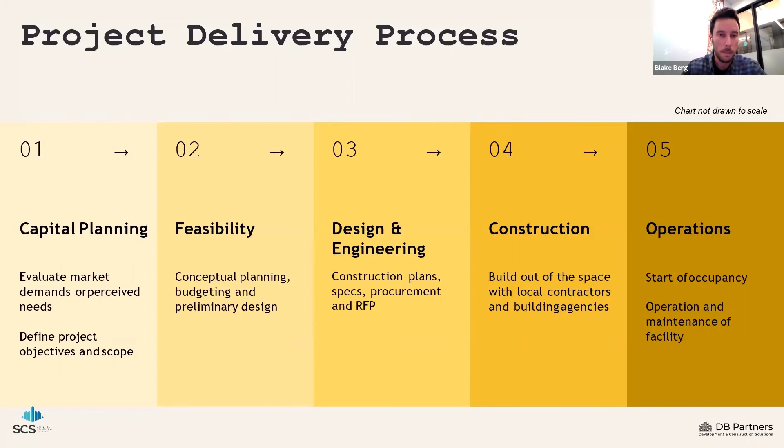And just a note, obviously this chart is not to scale, because the operations of an asset or of a building may last 10, 20, 100 years. Now, in layman's terms, what that really means is scope, schedule and cost. Now we're going to plan and figure out, okay, here's what we're going to do. Then we go and do it. And then, during operations, we're checking and adjusting. And so that really is a broken down version of the project delivery process from an owner's perspective.

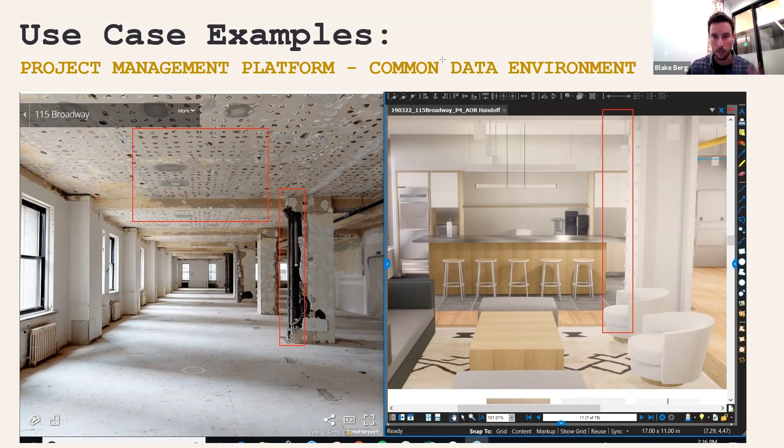I'm going to just keep going with this example. So, why invest in something like this? It's all about speeding up your time frame to deliver information, right? So instead of having 15 different people go to site, walk, survey for what they need to see, an owner can take this on, do a Matterport or similar, send this around to everyone, and the speed of delivery of design as well as planning and construction will increase.

Increased translation of information at key milestones. So again, you're trying to limit how much information falls through the cracks at each of the key milestones by sharing as much information as possible. You have your one source of truth. It's super easy using any of these platforms just to find information on the go versus having to run back to your office or your field office to find information.

Your workforce utilization increases. This is pretty key. It happens across the board on a lot of these things, but I'm all about making sure that your administrative burden reduces. And what that means is instead of everyone having people that do administrative work to stay organized, why not take it on in one office, as a project management office or as an owner, to keep the whole project organized and reduce the amount of administrative work people are doing so that they can spend more time doing the job that they're getting paid to do.

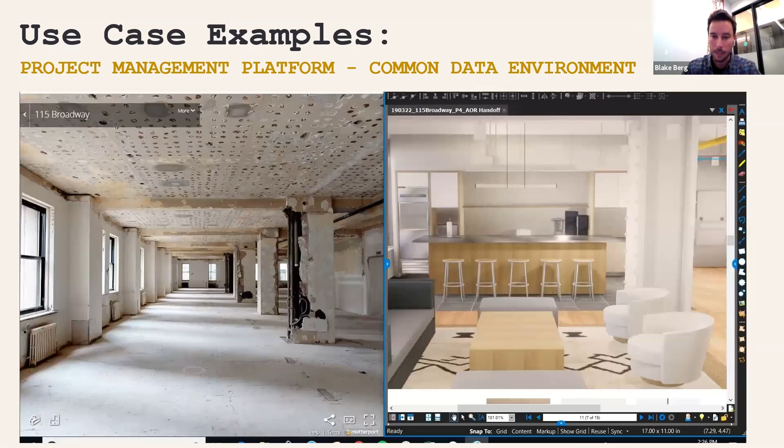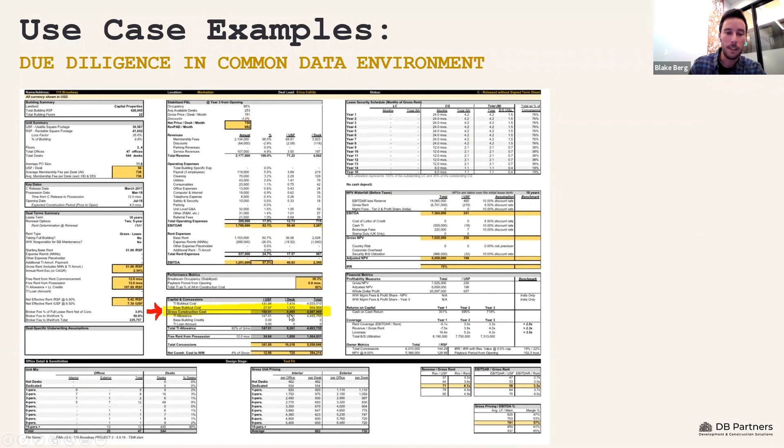And that way, what we're looking at on this screen is just a quick clip of a pro forma, right? And in a pro forma underwriting any sort of real estate deal, you're always going to see a number here for the construction budget. And typically, this is where you could either make or break your project. And so by bringing someone further upstream, by using a common data environment, getting contractors in to do something like this from day one really helps de-risk the project.

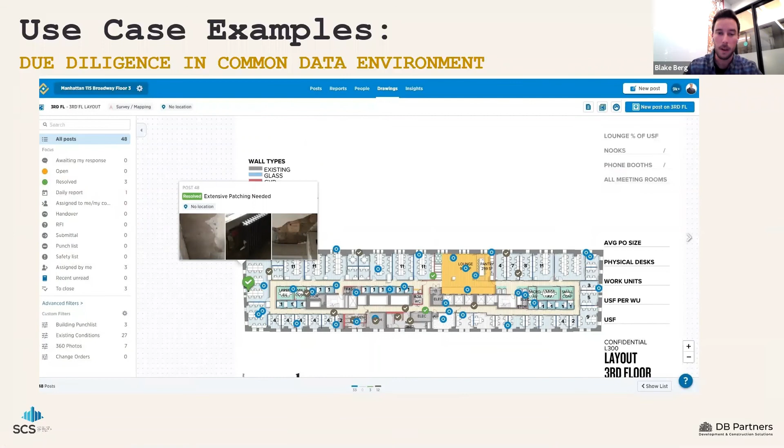Now, why do due diligence or pre-construction in a common data environment? Why invest? Again, it's a quicker time frame to compile information for feasibility. It's a lot less double work. I don't need to send an architect there to survey and then an engineer to survey and then a contractor to survey and then a subcontractor to survey. You bring them all in together from day one and you set the scope right from day one and design right into it with the right budget.

Now, I'm going to go into reality capture real quick. So just a use case here, right? Again, back in the TI world, with reality capture, especially in buildings that I'm used to working in in New York City, I go to take a building and it may be from the 1980s or the 1960s or the early 1900s. There may not even be drawings, right? So of course, in that scenario, it's key to do some sort of reality capture, and it's a lot quicker to send someone in there with a Faro scanner than it is to go and field survey with a clipboard. It's a lot more accurate too.

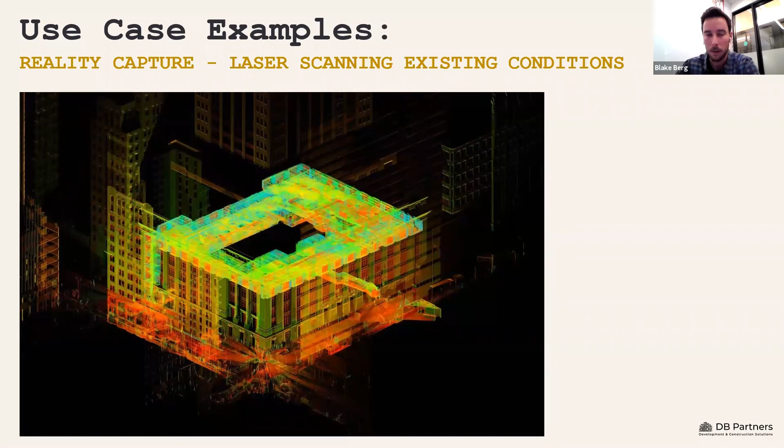Just another example is floor flatness, walls not being in the right place, staircase not being in the right place, facades not being straight. So it's trying to pick up with reality capture all those existing conditions that you're just going to get billed with come construction. You just want to pick that up from day one. You could do that with reality capture.

By doing that, your documents are going to be right from day one. So you're going to speed up your time frame come construction to be able to hit the ground running. That means your accuracy is going to be a lot better when you actually start construction. You can mitigate your existing conditions delays and cost overruns. You open up an opportunity for prefabrication, right? Because with a point cloud and a scan, you could really take true measurements.

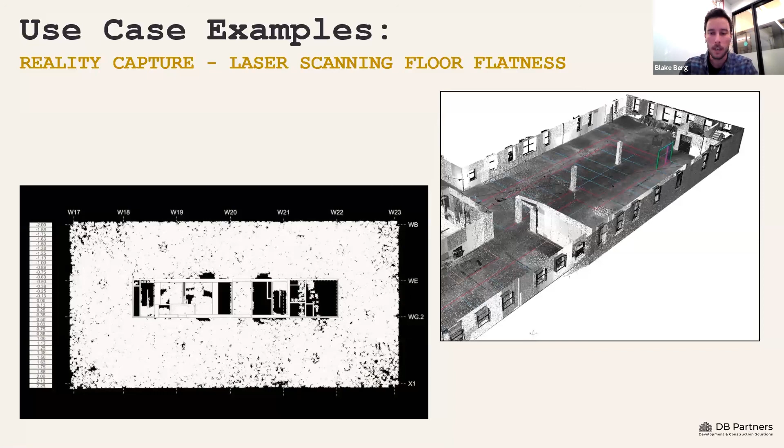And on a project in New York last year, or 2 years ago now actually, we used the scan and then the BIM model to actually prefabricate a stair opening and brought it right into site and flat packed and assembled it on site. And so it really opens the window for prefabbing or kit of parts and TI work.

And then of course you're connecting the field to the office, right? And so, I don't really like having a BIM person or a modeler or an engineer totally spending all the time in the field. They're more effective to me designing at their desk, but with the right information that they need.

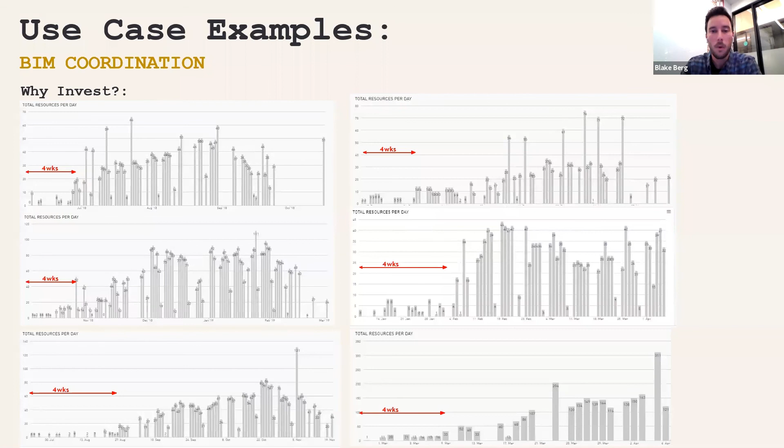And so my recommendation here is, let me show a chart as to why, but this is actually from a couple jobs last year that we did. And what happened was, by not starting BIM coordination until construction's supposed to start, guess what happens? Construction doesn't actually start. And so this is a graph of manpower on the job site, labor on the job site. And you see that on 6 jobs that I surveyed of how many people were there, we had about a 3 to 4 week gap where really not much activity was happening because we were still doing BIM coordination and submittals.

So that's where I say on the BIM coordination side, again, bring people in early, push it back into design and engineering. And if the architect and the engineer don't want to take on that scope because it's not their responsibility, no problem, bring a contractor or bring a BIM services company in and get the actual coordination done in pre-construction. And that way you can actually have your sign off before you start. And when you're supposed to start construction, you can have ductwork there.

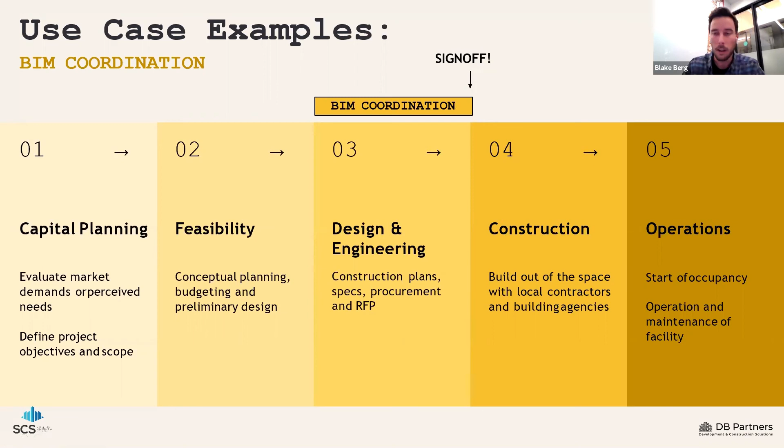To break that into some bite-sized chunks, BIM coordination, if it's going to start in design and engineering, really has to start early on. So there's a due diligence where you first really set the stage on BIM coordination by looking at all the existing conditions and even doing a scan if you have the ability to. Then during your design set, you focus on the mains. During the next set, your permit set, you're going to do a full coordination. And that way, once you're at 100% CD, you can do a full BIM sign off. Platforms there, Navisworks, any of the Autodesk platforms are great.

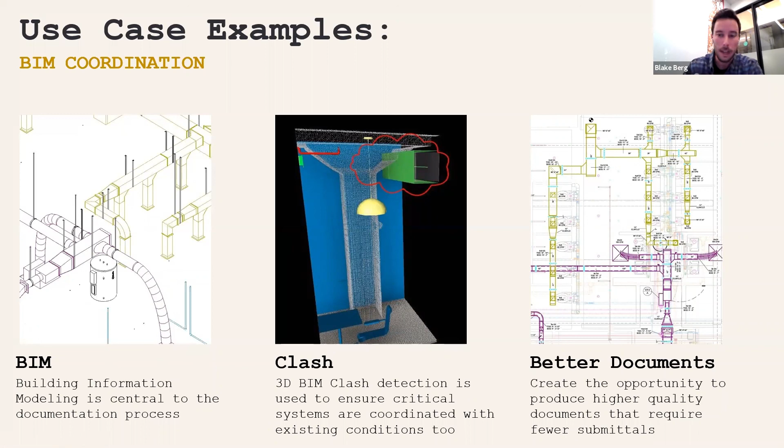And this kind of shows what you can do, right? We're picking up columns that aren't straight. We're totally trying to pick up water heaters or ductwork with real dimensions instead of what you may see on an engineering set, which is diagrammatic only. And so with this, you can do your BIM, you can do your clash, and you can actually go right into shop drawings by the time you have 100% CDs. Just a quick example, this is from another job in New York, but I opened up the drawings and the BIM model.

The BIM model was passed to ourselves to manage in pre-construction, and we actually were able to do the whole MEP design now, right? And what that ran into on this job was someone wanted to keep a nice staircase here, looks great. However, the schematic set showed ductwork right over the stairwell, and so we're able to pick this issue up with the point cloud from day one and not have it be a change order once we get

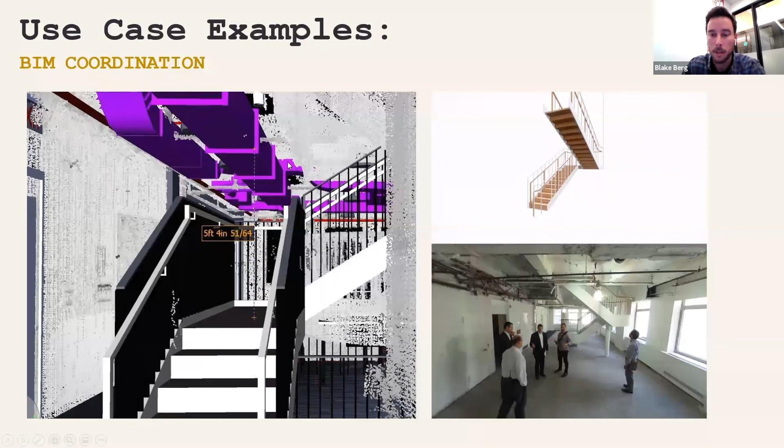to site. And so I'm seeing, okay, ductwork's running over the stairs, that height's not going to work. I can see existing piping in the scan, that existing piping is there, great, and I can come up with a solution that's going to move the team forward in pre-construction and not delay the job.

And then once it comes to the field, there are plenty of solutions today with Autodesk especially, but even with Procore and the others, you've got to get the model in the hands of the supers. There's no reason not to have the model in the hands of the people doing the work, the supers, the foremen, the trades folks, using it as a reference to understand what they are building and what the design intent

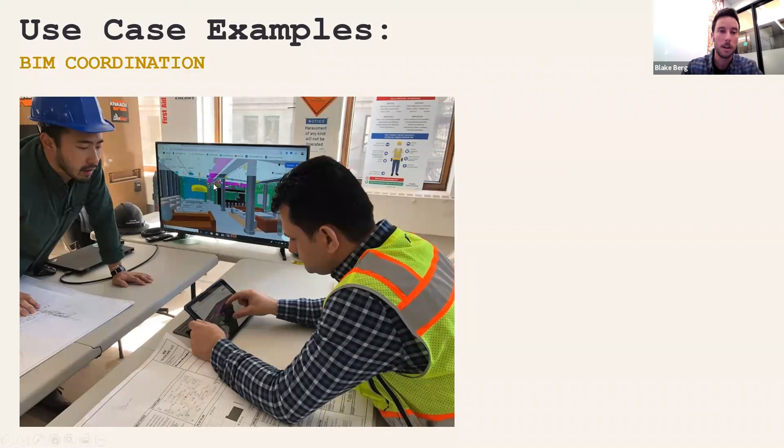is. So this, to me, 1,000 times over, I'm going to look at this rather than look at a drawing, because this actually gives me some color in terms of what we want to build at the end of the day. So why invest on the BIM coordination side of things? You hit the ground running. Your speed to market's incredible if you can get all your ducks in a row. Your first time quality should be there because you do the scan first and then you end up doing coordination and clash.

Coordination delays and cost implications are in pre-construction, and so you reduce the amount or the effect that has on the construction period. And the biggest kind of metaphor is, if you're a sports player, we'll give the example of football. If you're a football player, you're never going to show up and just play in the Super Bowl, right? And so doing this stuff before you get to the game is essentially you're practicing and you're making sure you have everything right before you show up for the game. And on game day, everything's got to go per the plan.

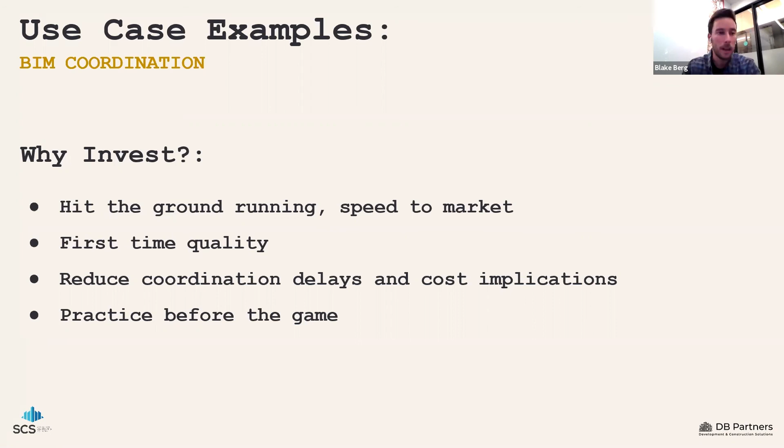Now, if I were to look at the drawings in a traditional world without my 360 Matterport, what it says is contractor to patch and repair existing column conditions to receive specified finish per the finish plan. Okay. It also says GC to patch and repair all existing walls as required and prepare the existing walls for new finishes, existing ratings to be maintained throughout construction, typical.

So in this example, every exterior wall is gray. All the columns are gray. All the core walls are gray. And so if I'm a carpenter, I have probably three options here. I can either be the low guy and exclude everything that's gray, and without having access to this 360 walkthrough, just looking at the drawings, I'm going to say, I don't really know what that means. Could mean anything. So I'm just going to qualify something and give it really low, because if I give something that covers them, I'm probably going to lose the job in a bid situation.

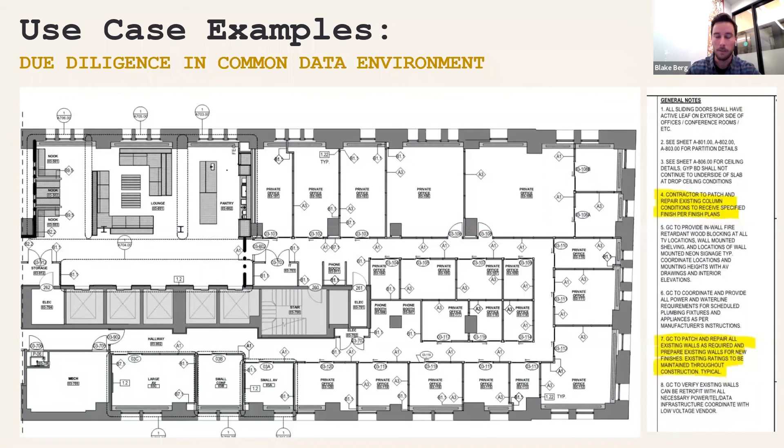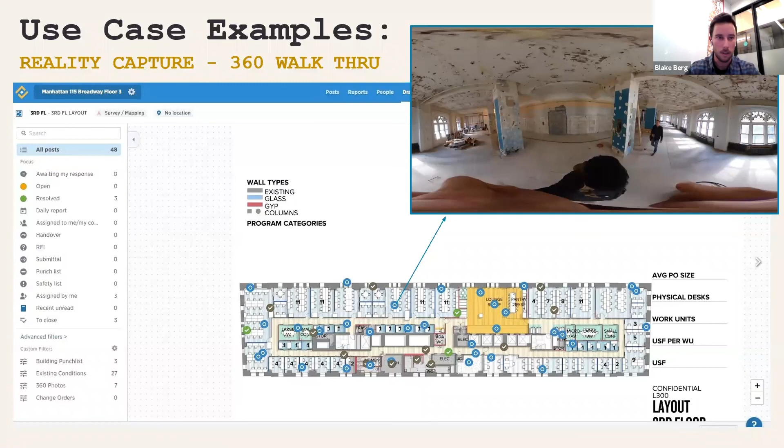Wow, this is great. If I'm a facilities person, I can kind of use this throughout construction to monitor where rough-in is going. So if I have any capital improvement work after the fact, I can plan better. And so 360 capture throughout construction is really, really a huge asset.

Now, there are plenty of options for 360 capture. There's OpenSpace, there's HoloBuilder, StructionSite, Procore's got integrations with all those, EarthCam, Matterport, FieldLens. So just a couple of solutions there, PlanGrid on the 360 side. And then on the camera side, if you're not doing this now and you're trying to figure out where to start, you've got the Matterport camera, a little higher end. You've got the Insta360 One X, about $400, a great investment, or the Theta, which is also about $400 and a great investment to use over your head.

So why invest in the 360 walkthrough and reality capture? Speeding up your time frame to solve field delays. I didn't really talk about this, but if you've got projects around the US, or if you have teams that are working on multiple projects, then they would be better served if they were on site every day, which is impossible. When issues do come up, to be able to open up a 360 walkthrough and answer a question really keeps things moving for architects, for engineers, for owners.

You reduce the strain on your overhead resources because you could send one guy to site if you need to and share it with 100 people. You're connecting your field to your office people. Everyone's on the same page. Everyone's delivering in unison. Better staff, resource utilization again, and your historical documentation truly adds value for your facilities team come operations.